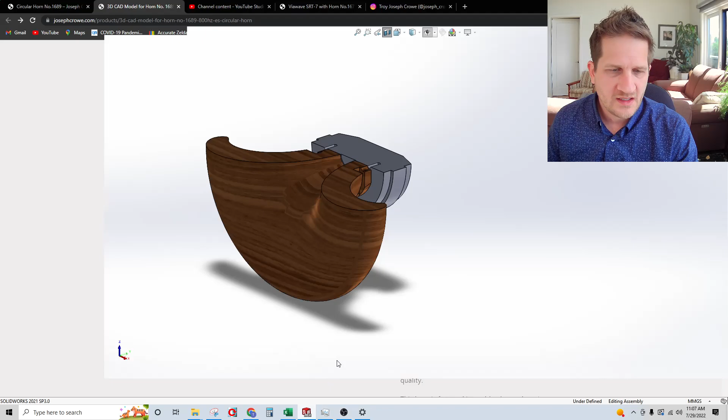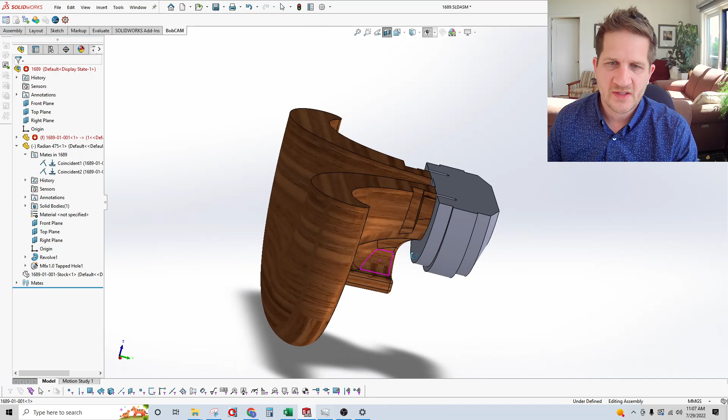Looking at the overall design of this particular horn, I used a T-slot cutter mounted in my CNC machine to produce this undercut, and I'm able to mount the driver in a really elegant way so that it doesn't have any separate pieces or adapters to mount the driver. The stud that comes with the compression driver, typically an M6 by 20 millimeters long stud, and this just facilitates that.

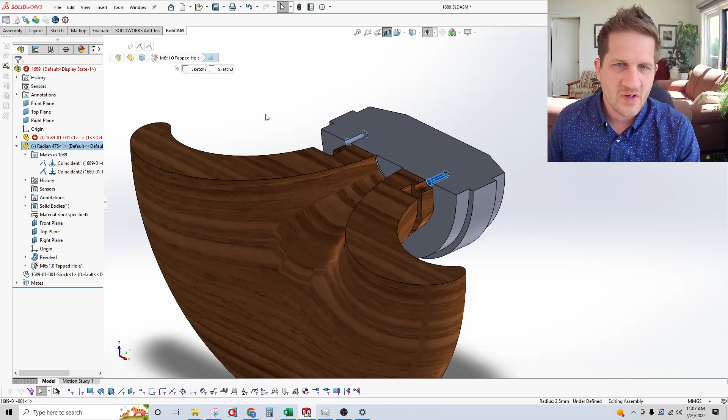Then you just put the nut on there. I haven't shown it in my CAD model, but you get the idea. Now the overall horn flare geometry uses my ES horn flare curvature, and it has the complete wraparound, and then it's actually recessed out on the back side of the horn.

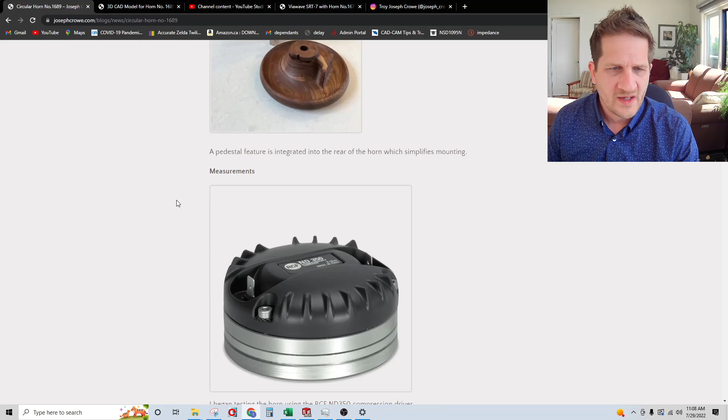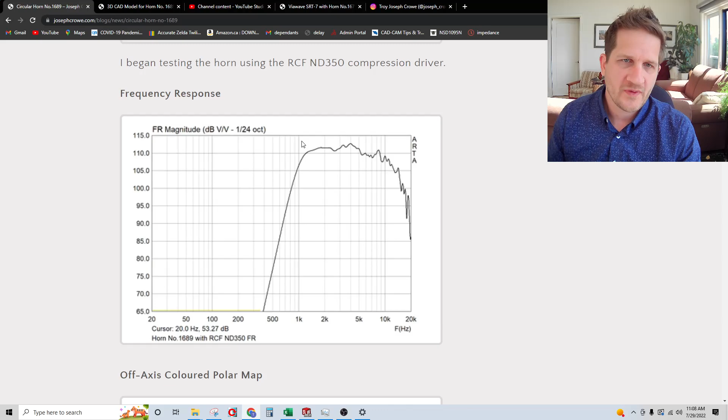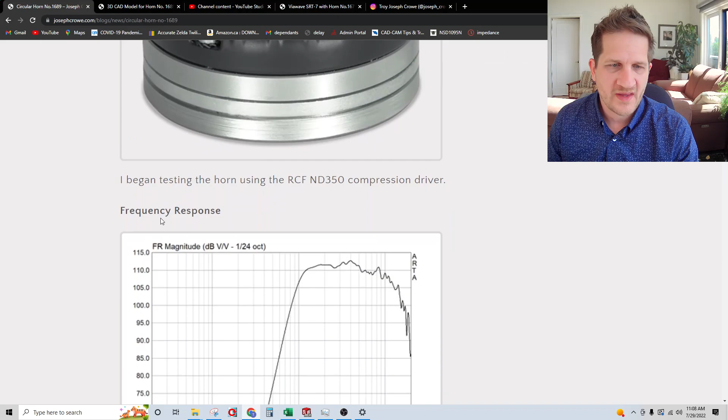Now, going to the actual test data, I started out with the RCF ND350, and you can see here the resulting frequency response. When you're dealing with horns, if the mouth area is too small, what you end up with is what's called first order reflections as a result of the abrupt change at the mouth of the horn. What I've tried to do here is create a very wide flare rate with a very large mouth area. The goal is that you have virtually no first order reflections at the low frequency cutoff of the horn.

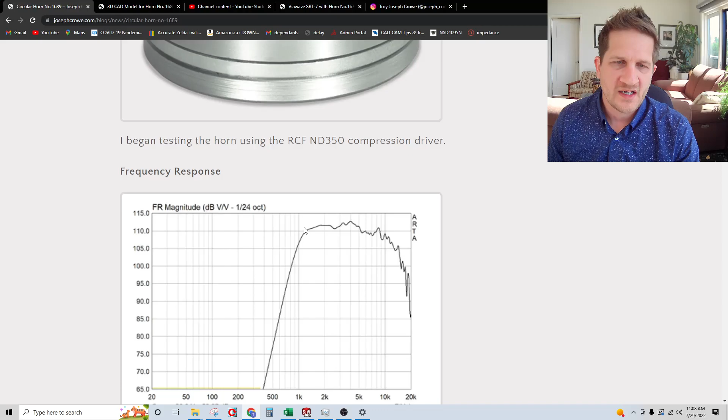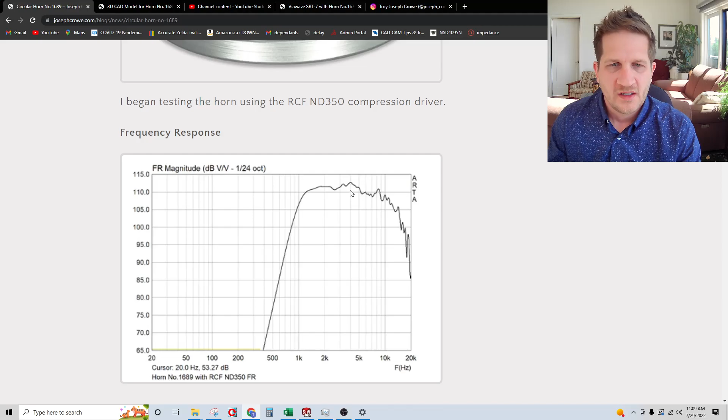If the mouth of the horn was too small, you'd start to see frequency response peaks and valleys near the cutoff of the horn. You can see clearly that the horn is completely absent of any of that, which indicates that the horn is free of first order reflections. That is probably what people find most objectionable with horns, that there's reflections occurring in the horn. The goal here is to create a horn that's completely void of any reflections whatsoever. You can see that the response is relatively smooth. It does have a falling response.

This is significant in that when you're doing your crossover design, you're able to pair this horn with a woofer that's quite large. For example, you can go up to probably a 12-inch woofer with this particular design. When you do your crossover point at, say, 800 hertz, you're going to have a really good matchup in the off-axis polar with this particular horn.

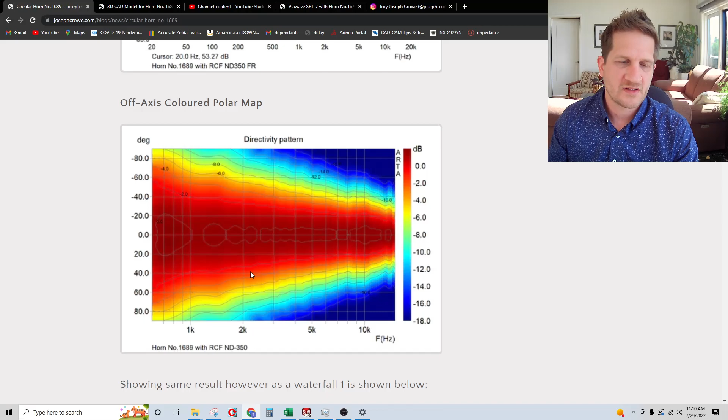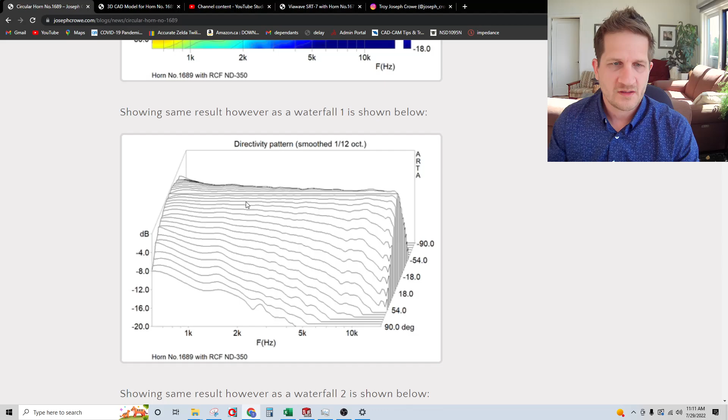If I had tried to make the mouth smaller, we would see issues, like I mentioned earlier, in the frequency response. But in addition to that, we would have less pattern control in the 800 hertz region. You'd see this red start to go right over into the 90 degrees off axis. So we would have an inconsistency in the matchup at the crossover point if we were to go with a smaller mouth horn. So that's just something from a general design perspective of what we're trying to achieve here.

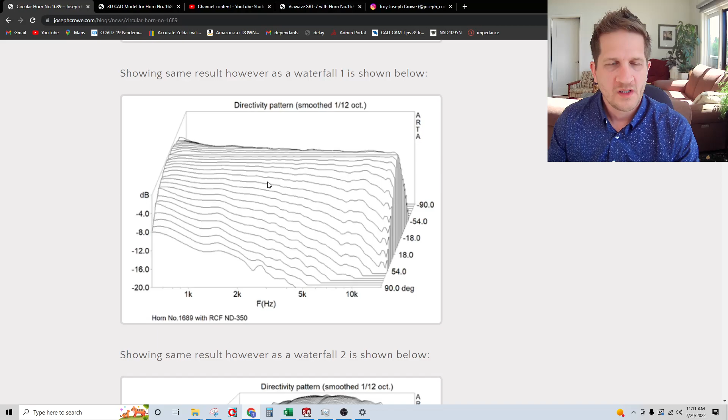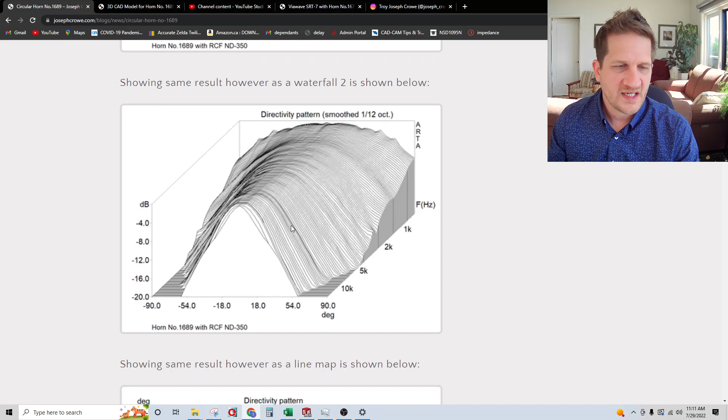I've shown the off-axis in a different way, which is a waterfall type display in the ARTA software. There's another way of showing it again. I think this is called Waterfall 2 in ARTA software, and it highlights how consistent the off-axis is, which indicates that the horn is free of any edge diffraction or resonances. I've gone to really great lengths to minimize any chance of this horn having any kind of coloration to the sound.

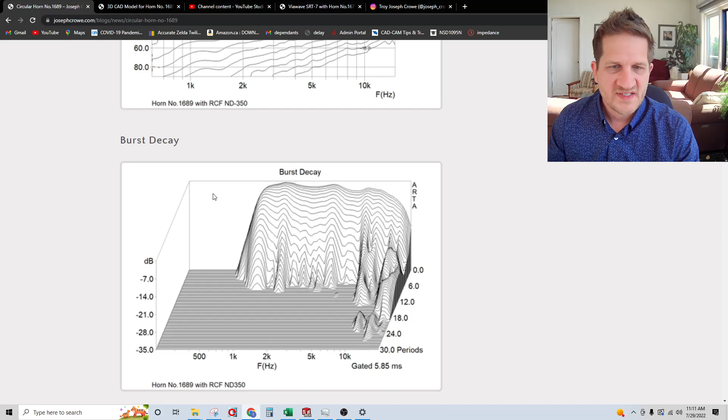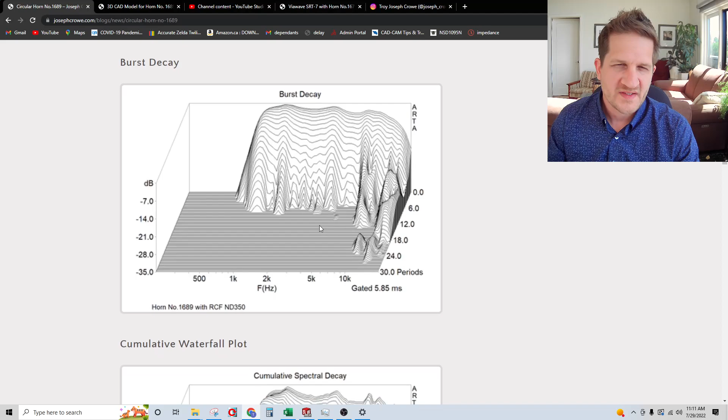Burst decay: we're seeing a very clean burst decay on the RCF compression driver. At 10 kilohertz, there is a mild resonance, but this is pretty typical for compression drivers of this type. I've started to show cumulative spectral decay as well. Here you can see this is likely the mechanical resonance of the driver, which in the published data for RCF is just below 1 kilohertz. But the nice thing about the RCF is it has bandwidth from about 1 kilohertz up to where the main breakup mode is, around 15 kilohertz. Step response is free of any kind of abrupt issues.

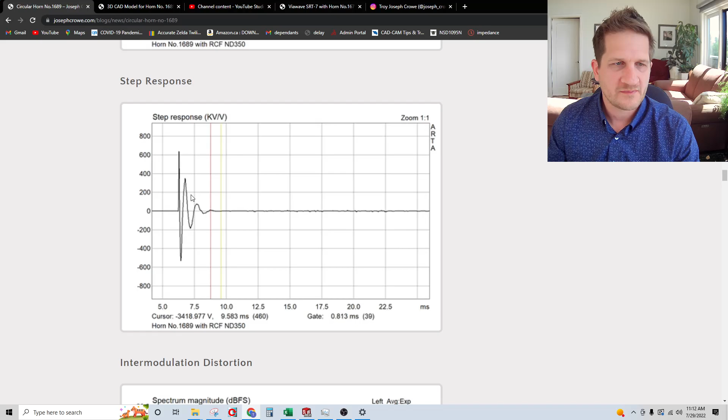You can see that it has a very fast rise and decay. Looking at distortion on the driver, this is very typical. This is a 12-band multi-tone at 90 dB, and the test signal starts at 1 kilohertz up to 20 kilohertz. So distortion, you can see here, rises a little bit, which we'll see later is pretty consistent with the other brands of compression drivers.

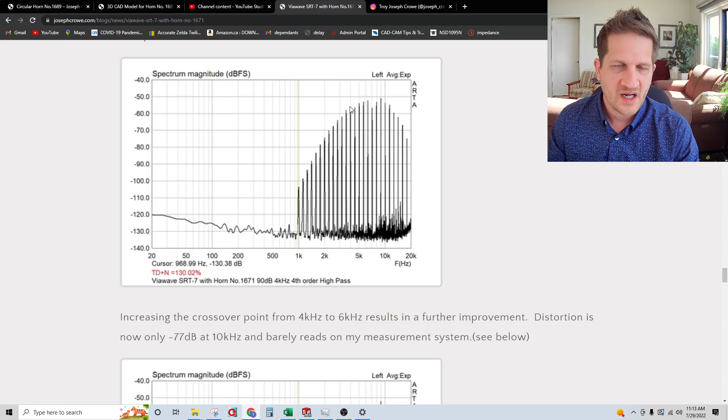I did want to point out, though, the ViaWave SRT7 at the same test SPL, I have it here. Now I am using a 4 kilohertz high pass on this, but it does highlight the superiority of the pure ribbon from ViaWave when it comes to distortion. It's a full 75 dB down on the distortion.

So just a side note there, that there are other driver formats that do quite a bit better than the compression drivers. Now I will mention too that a dome tweeter will do worse than this compression driver. So in order of superiority, we would go dome tweeter, compression driver, and then the best that I've been able to measure is the ViaWave pure ribbon tweeter.

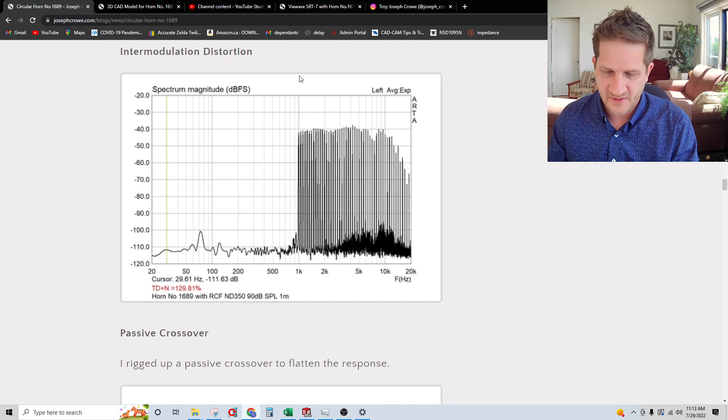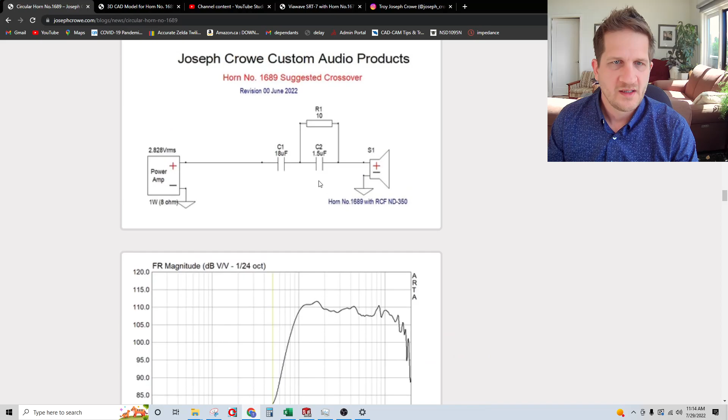So now I decided to implement a passive crossover on the RCF compression driver. I did a first order high pass, and then I did a contour circuit, and I did an overlay. So here you can see the blue is the raw response of the compression driver, and then the contour circuit, which is comprised of a 10 ohm resistor and a 1.5 microfarad capacitor. What that's doing is contouring the response across its bandwidth, and it's allowing the high frequencies in the 15 kilohertz region to maintain the same level.

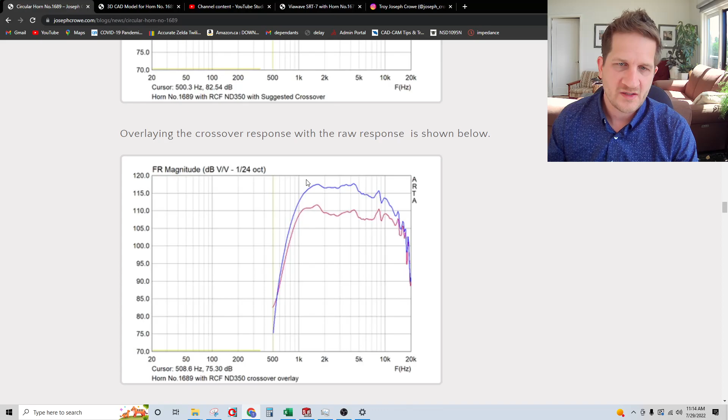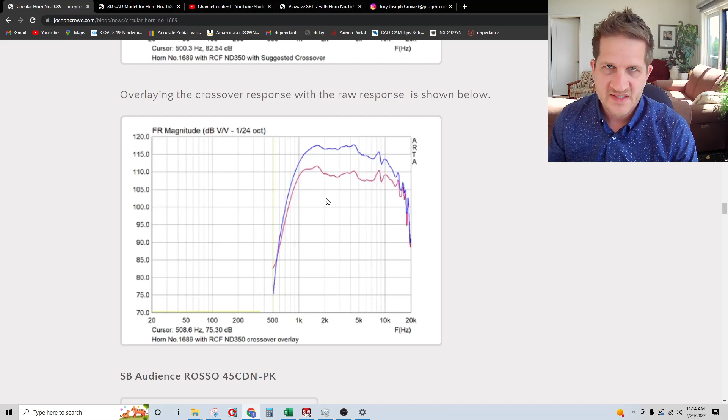However, through the mid part of the compression driver, we're bringing it down around 7 dB. And so we're flattening the response of the driver. What that's going to do is bring up more upper treble detail out of the compression driver. And this is certainly worthwhile doing. It's going to balance out the overall sound and make it sound a little more hi-fi.

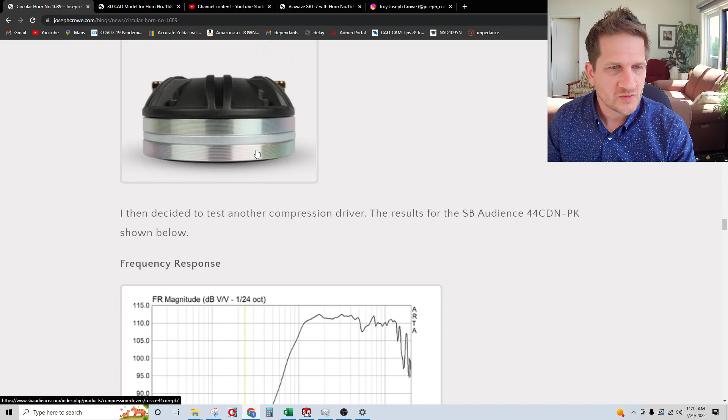And so the next test, I tested the SB Audience Rosso 45 CDN PK. I believe the PK means, actually, I don't know for sure. I'd have to look that up. But you can see here the response of this. Now, this has a flat response in the sense that the lower treble is consistent with the upper treble. And we do see the breakup starting to occur at around 14, 15 kilohertz.

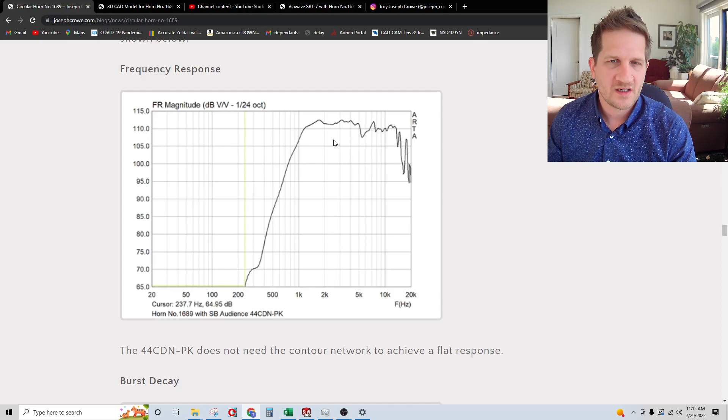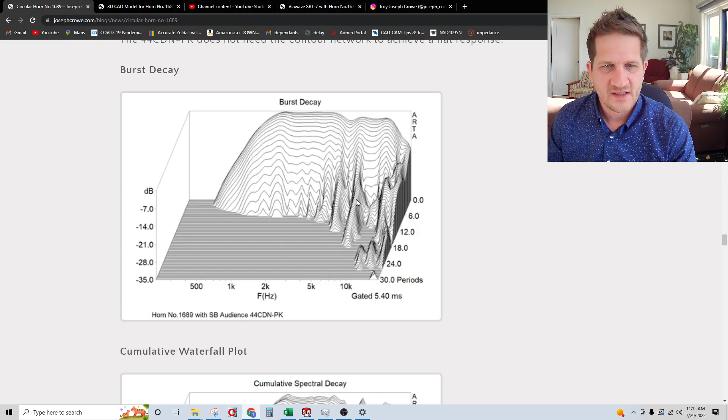Burst decay, we can see that it's not as clean as the RCF. We do have some resonances in the 6 and 8 kilohertz region, and then things get pretty bad at the breakup, which is to be expected. And then the waterfall decay, you can see pretty strong resonances there. Nothing really noteworthy on the step response.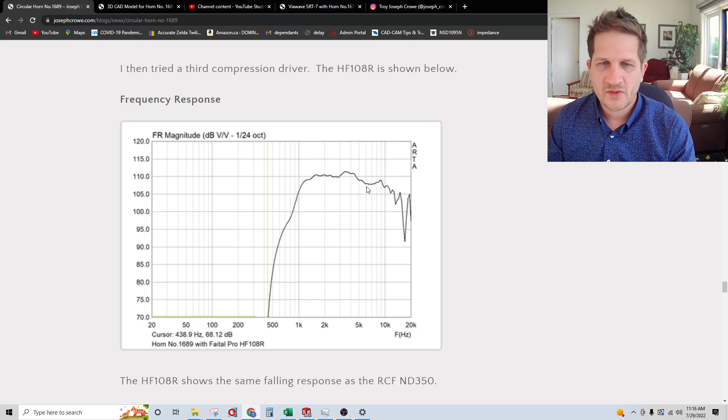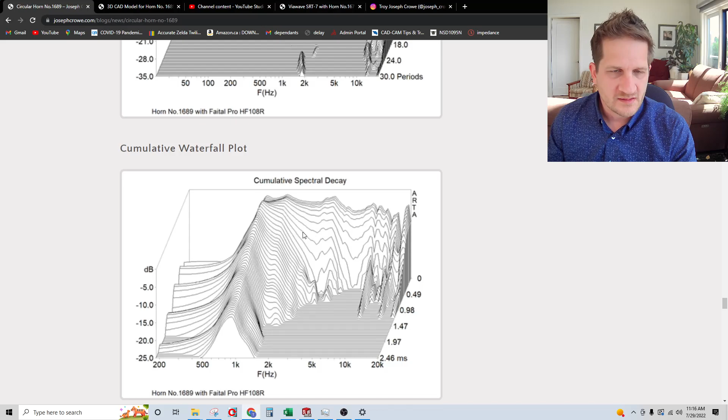So the next driver that I tested was the Faital Pro HF108R. You can see the response here. It's actually quite good in the sense that it's quite flat until its breakup, which happens a little earlier at around 13, 14 kilohertz. But it is showing a very flat response. The burst decay is showing a very clean result until you get to the breakup. And the waterfall again is showing a pretty clean result as well.

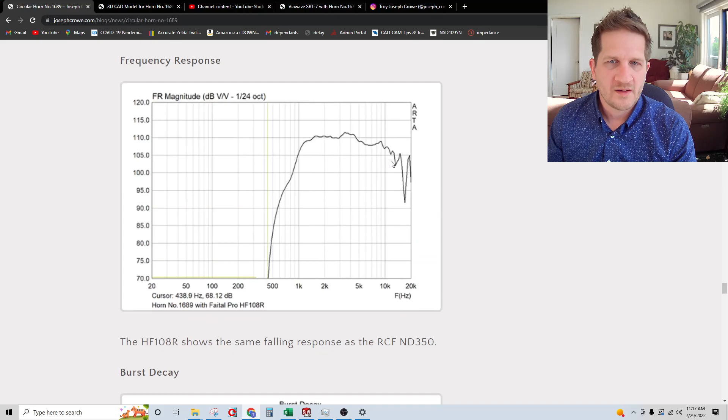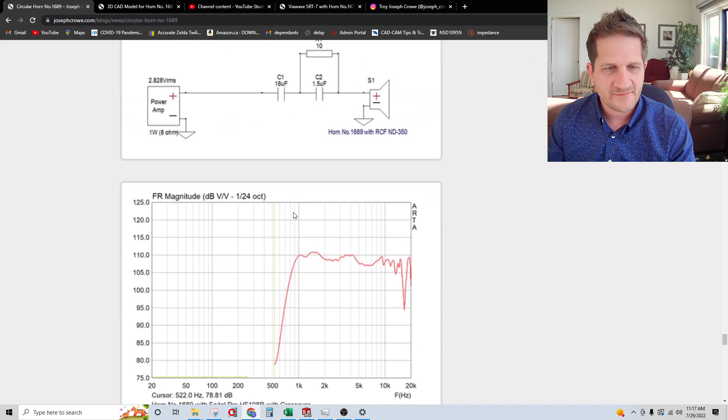And so I decided to use the same passive crossover on this driver as well that I did with the RCF. You can see the response here is pretty linear, and then it gets a little bit ragged past 10 kilohertz. I'm just doing an overlay with the passive crossover against the raw response of the driver.

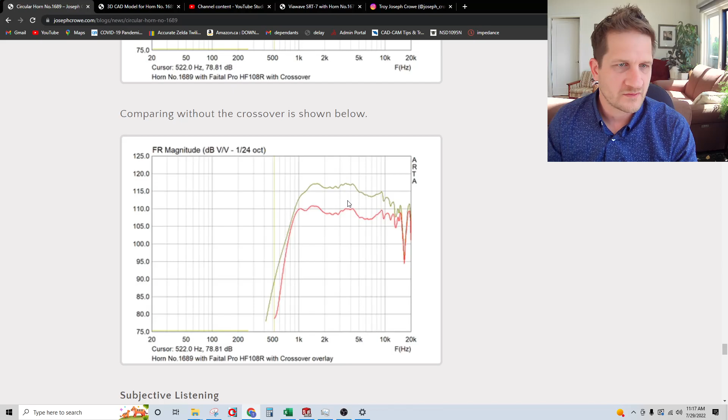So now I did subjective listening on these, and I found that the RCF and the Faital driver produced very refined, detailed sound quality, and the SB Acoustics trailed closely behind the RCF and the Faital. If I had to pick between the RCF and the Faital, I would pick the RCF.

Subjectively, I found that it had a really rich and full vocal region, a very rich sound. And with the horn, I was able to hear every little subtle nuance in the soundtrack, making for a very enjoyable listen. So that pretty much concludes this.